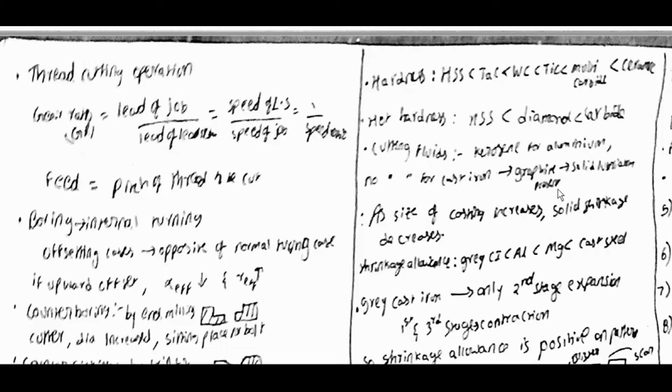As size of casting increases, solid shrinkage decreases. Shrinkage allowance: grey cast iron less than aluminium less than magnesium less than cast steel. Grey cast iron: only second stage is expansion, first and third stage are contraction. So shrinkage allowance is positive on pattern.

Gaseous defects in casting: this is blowhole, on surface blister. If it is like this, then scar. These are pinhole porosity due to dissolved hydrogen gas. Chills to promote unidirectional solidification. Padding, it will be like this: taper of thinner section to thicker section to change progressive solidification to directional solidification. Chills to promote unidirectional solidification, paddings to directional solidification.

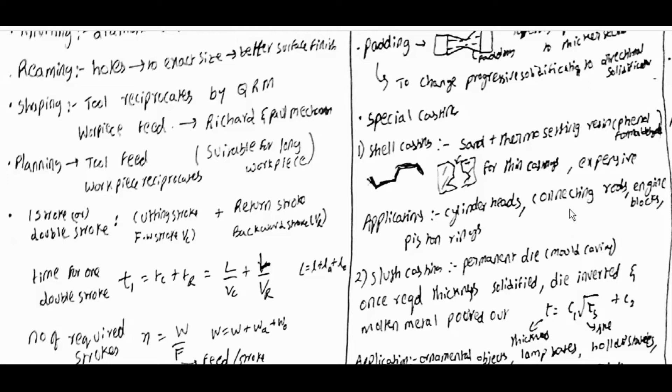Special castings: shell casting, sand plus thermosetting resin, phenol formaldehyde, for thin castings, expensive applications, cylinder head, connecting rods, engine blocks, piston rings.

Slush casting: permanent die mold cavity, once required thickness solidifies, die is inverted and molten metal is poured out. T is equal to C1 root tau plus C2. T is thickness, tau is time. Applications: ornamental objects, lamp bases, hollow statues, candlesticks, etc. from low melting point materials.

Investment casting: wax pattern by pressure die casting or centrifugal. Ceramic mold investment, investment cleaning, dry alcohol coating, stuccoing and drying, coarse ceramic particles, slurry of refractory material. Good surface finish, high dimensional accuracy. Application: aerospace and power generation, turbine blades industry.

Centrifugal casting: molten metal whirlpool design, low density impurities at internal surface, no core required, fine grain structures at outer surface, free from impurities. 100% casting yield. Casting yield is equal to volume of casting by volume of metal poured.

Squeeze casting: open die, then a punch is used to apply pressure. Plaster casting: slurry of plaster on pattern. Pit molding: sand, concrete, cement. Continuous casting, strand casting: molten metal solidified directly into semi-finished billets, blooms or slabs.

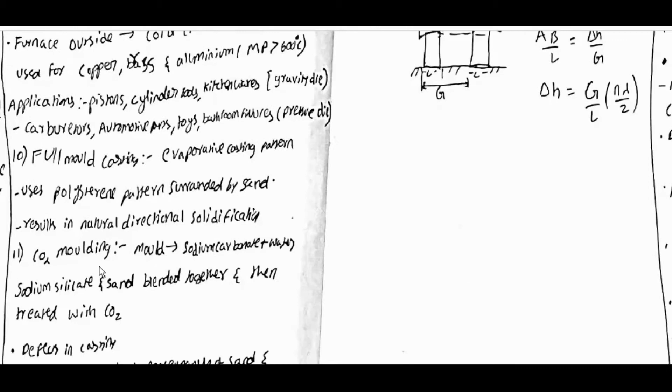CO2 molding: mold of sodium silicate plus water and sand blended together and then treated with CO2. Defects in casting: buckling defect due to poor expansion of sand, high pouring temperature; rat tail defect due to poor expansion of sand. Talysurf, electronic instrument to measure surface finish instantly, diamond point, profilometer, Ra, Rt, Rz.

Interferometry: this is constructive, 2 lambda by 2, 4 lambda by 2, 6 lambda by 2, bright; destructive, dark, lambda by 2, 3 lambda by 2, 5 lambda by 2, merging of two sources of light. Optical flat: AB is equal to n lambda by 2, delta theta is equal to AB by L.

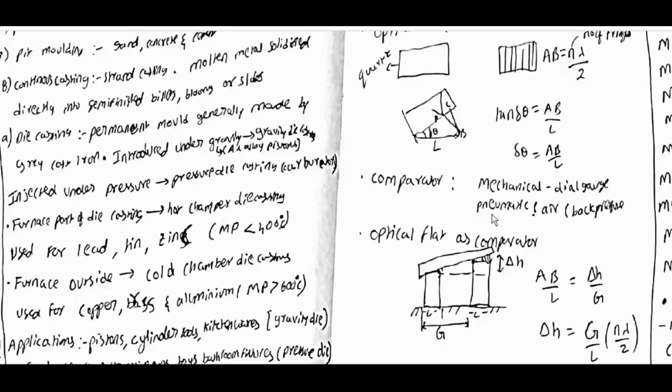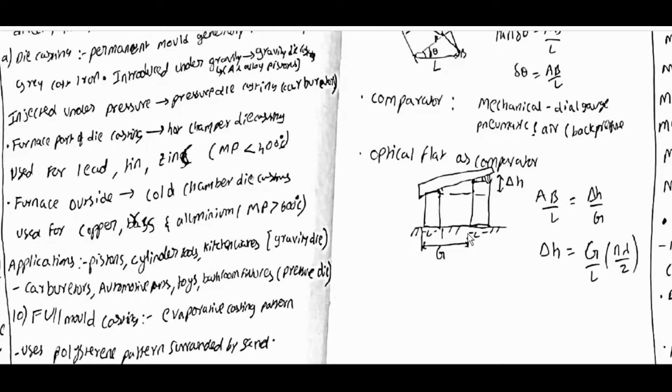Comparator: mechanical dial gauge, pneumatic and air back pressure. Optical flat as comparator. This is delta H. AB by L is equal to delta H by G. Delta H is equal to G by L into n lambda by 2.

M codes: M00 program machine stop, M01 planned stop, M02 end of main program, M17 end of subprogram, M30 end of main program with use of subprogram, M03 spindle rotate clockwise, M04 spindle rotate anti-clockwise, M05 spindle stop, M06 tool change, M07 coolant pump on first, M08 coolant pump on second, M09 coolant pump off, M10 clamping, M11 declamping.

DNC, direct numerical control: a number of individual NC machines are connected to a host computer, bulk memory. DNC, distributive NC: host computer connected to individual CNC. ANC, adaptive NC: liberty to individual CNC to adapt to parameters. ASRS, automatic storage retrieval system: it is a mechanized warehouse. AGV, automatic guided vehicle: material transport system. CMM, coordinate measuring machine: inspection purpose.

Transformation, rotation by theta: x prime, y prime is equal to cos theta, minus sin theta, sin theta, cos theta times x, y. The new coordinate x prime is equal to x cos theta minus y sin theta, y prime is equal to x sin theta plus y cos theta. Reflection about origin: x prime is equal to minus x, y prime is equal to minus y. That means if it is here, then it will be here.

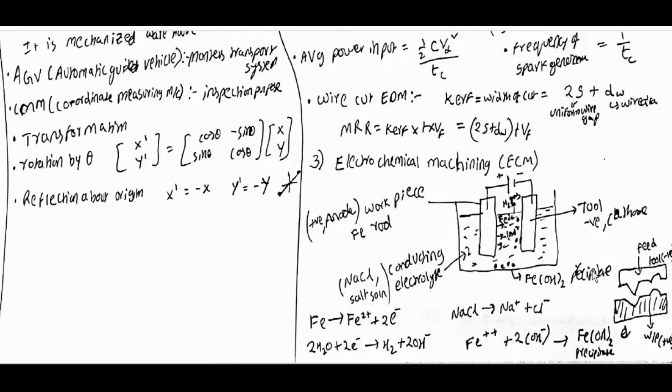Electrochemical machining, ECM. Workpiece, iron rod, positive anode; tool, negative cathode; conducting electrolyte, NaCl salt solution; Fe(OH)2 precipitate. Fe gives Fe2+ plus 2 electrons, 2H2O plus 2 electrons gives H2 plus 2OH minus, NaCl gives Na plus and Cl minus, Fe2+ plus 2OH minus gives Fe(OH)2 precipitate. Feed tool negative, workpiece positive, we can get it in this shape.

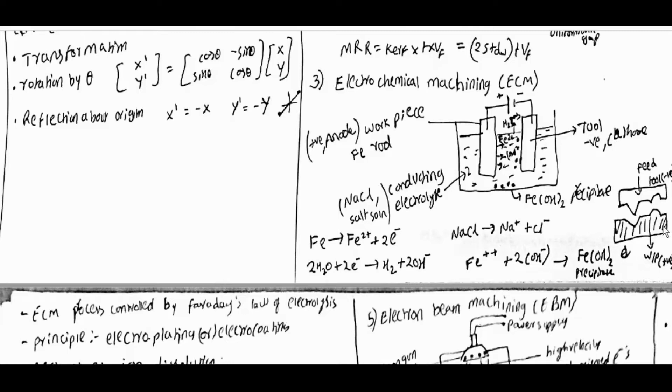ECM process is controlled by Faraday's law of electrolysis. Principle: electroplating or electrocoating. Mechanism: ion dissolution. Conducting tool and workpiece, conducting electrolyte. Wear ratio is equal to infinity, no tool wear. Mass MRR is equal to AI by ZF. I current, A atomic weight, Z valency, F Faraday's constant, 96,500 coulombs. Volumetric MRR is equal to AI by rho ZF. MRR is directly proportional to conductivity of the conducting electrolyte solution. MRR is inversely proportional to distance between electrodes.

MRR is inversely proportional to the distance between electrodes. That means if the distance is less, MRR will be more. Application: complex contour components, for example turbine blades. MRR: PAM greater than ECM greater than EDM greater than USM greater than EBM greater than LBM. USM is in the middle; ECM is first, then EDM, then USM, EBM, LBM.

For alloys, mass MRR is equal to I by F into (Z1 by A1 into X by 100 plus Z2 by A2 into 100 minus X by 100), with X percent 1 and X percent 2. Volumetric MRR is equal to I by F into (rho 1 Z1 by A1 into X by 100 plus rho 2 Z2 by A2 into 100 minus X by 100); the rho terms come in the denominator. If alloy density is given, put rho 1 equal to rho 2 equal to rho 12.

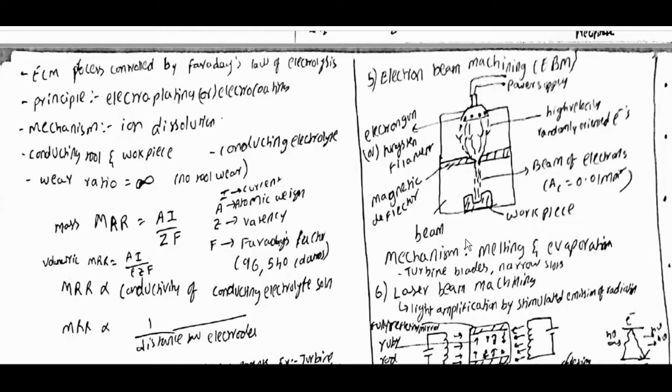Electron beam machining, EBM: power supply, electron gun or tungsten filament, high velocity randomly oriented electrons, magnetic deflector, beam of electrons, area equal to 0.01 mm square, workpiece. Mechanism is melting and evaporation; used for turbine blades and narrow slots. Laser beam machining: laser means light amplification by stimulated emission of radiation.

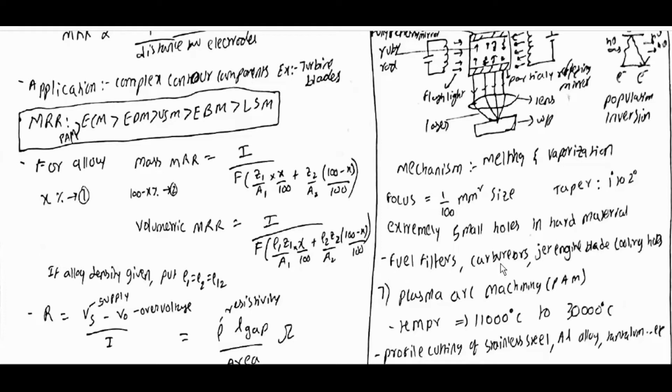Fully reflecting mirror, ruby rod, flashlight, partially reflecting mirror, lens, laser, workpiece, population inversion. Mechanism is melting and evaporation, focus 1 by 100 mm square, taper 1 degree to 2 degrees, extremely small holes in hard material, fuel filters, carburetors, jet engine blade cooling holes. Plasma arc machining, PAM: temperature 11,000 to 30,000 degrees centigrade, profile cutting of stainless steel, aluminum alloy, tantalum, etc.

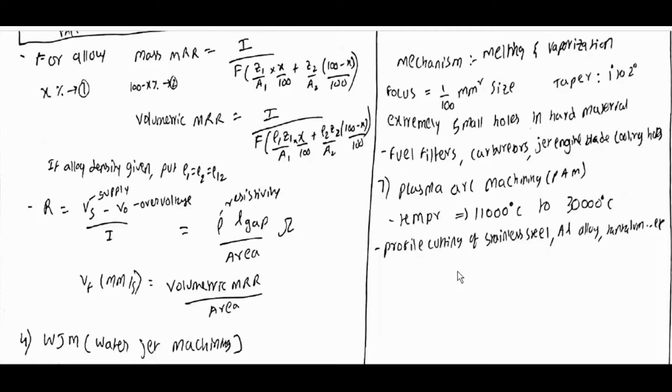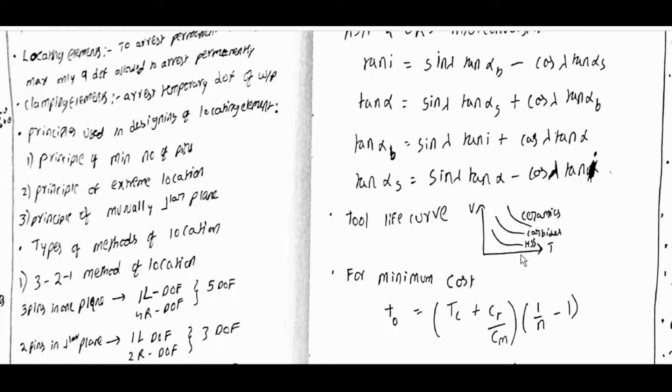Tool life, VT: ceramics, carbides, HSS. For minimum cost, T0 is equal to (TC plus CR by CM) into (1 by n minus 1). TC is tool changing time in minutes. CR is tool regrinding cost plus tool depreciation or replacement cost.

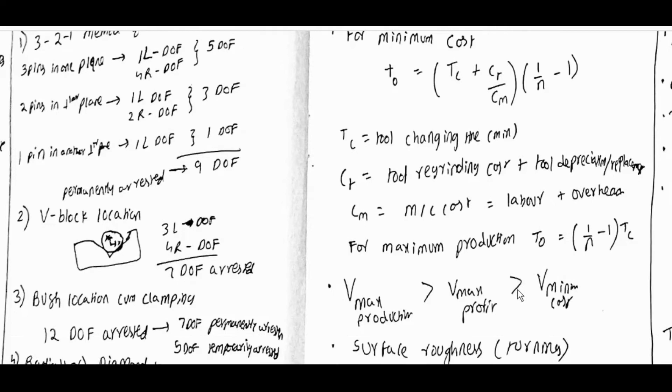CM is equal to machine cost, labor plus overhead. For maximum production, TO is equal to (1/n − 1) into TC. V maximum production greater than V max profit greater than V minimum cost.

Surface finish for turning: ideal surface, R is equal to 0. H is equal to F by (tan psi s plus cot psi e). RA is equal to H max by 4. Practical surface, R not equal to 0. H is equal to F square by 8R. RA is equal to F square by 18 root 3 R.

Cutting fluids: primary aim is cooling, secondary aim is lubrication. Cast iron, dry compressed air; brass, no coolant required and no coolant is used. Aluminium, kerosene oil. Planimeter used to measure surface area. Optical flat, use monochromatic light to determine flatness by interference. Delta H is equal to n lambda by 2.

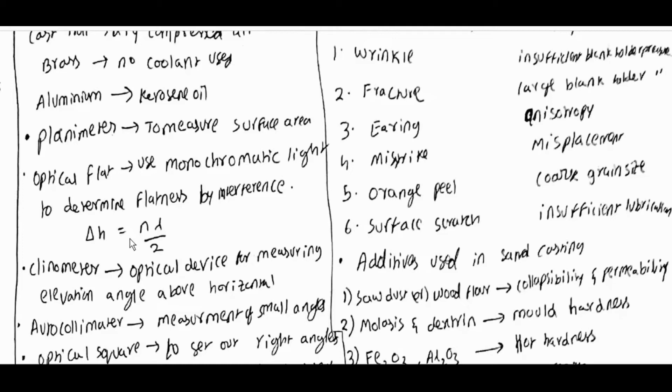Clinometer, optical device for measuring elevation angle above horizontal. Autocollimator, measurement of small angles. Optical square, to set out right angles. Laser scanning micrometer, inspection of tiny workpiece at high temperature and motion. McLeod gauge, used to measure vacuum. Telescopic gauges, used to measure bore size.

Pack rolling, aluminium foil. Rolling: cos alpha is equal to 1 minus delta h by D. Delta h max is equal to mu square R. Projected length LP is equal to R sin alpha is equal to root R delta h. Roll separating force is equal to sigma naught into LP into B.

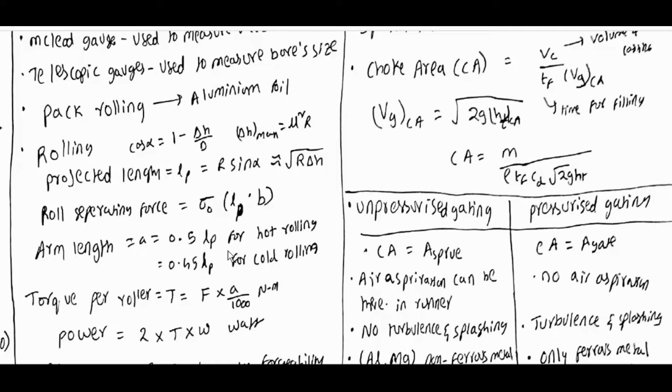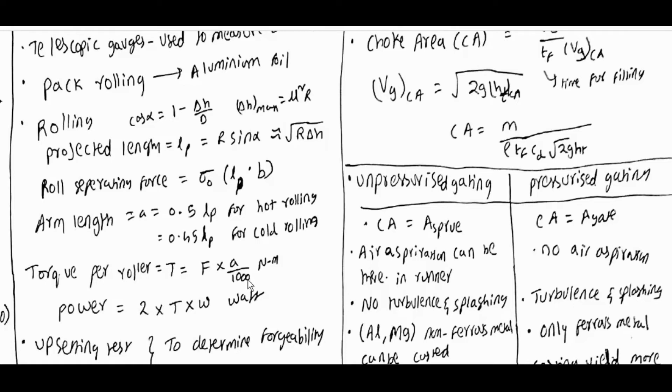Arm length A is equal to 0.5 LP for hot rolling, 0.45 LP for cold rolling. Torque per roller, T is equal to F into A by 1000 Newton meter. Power is equal to 2 into T into omega watt. Upsetting test, hot twist test to determine forgeability.

Hot forging, molten glass as lubricant; cold forging, phosphate as lubricant. Sequence in closed die forging: fullering or swaging, edging, bending, drawing, flattening, blocking, finishing, trimming. Limiting drawing ratio LDR in deep drawing is equal to capital D by small d, which will be 1.6 to 2.3.

Defects in drawing and causes: wrinkle, insufficient blank holding pressure; fracture, large blank holder pressure; earring, anisotropy; misstrike, misplacement; orange peel, coarse grain structure; surface scratch, insufficient lubrication.

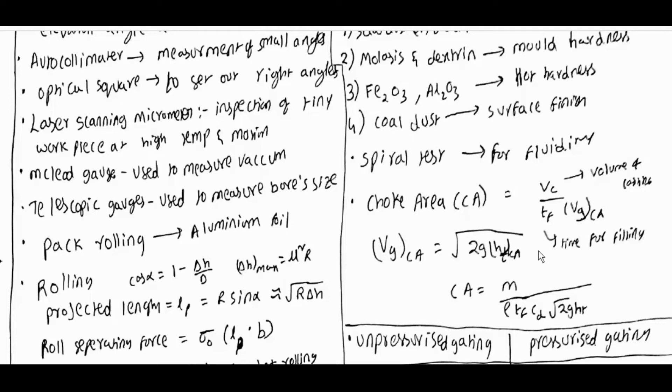Spiral test for fluidity. Choke area CA is equal to VC by TF into VGCA. VC is volume of casting. VGCA is equal to root of 2G HTCA. TF is time for filling. Choke area is equal to M by rho TF into CD root 2G HT.

Unpressurized gating system, choke area is equal to A sprue. Pressurized gating system, choke area is equal to A gate. Air aspiration can be there in runner. Unpressurized, pressure decreases, so air aspiration can be there. No air aspiration in pressurized gating system. No turbulence and splashing; turbulence and splashing. Aluminium, magnesium, non-ferrous metals can be cast in unpressurized gating system. Pressurized, only ferrous metal can be cast.

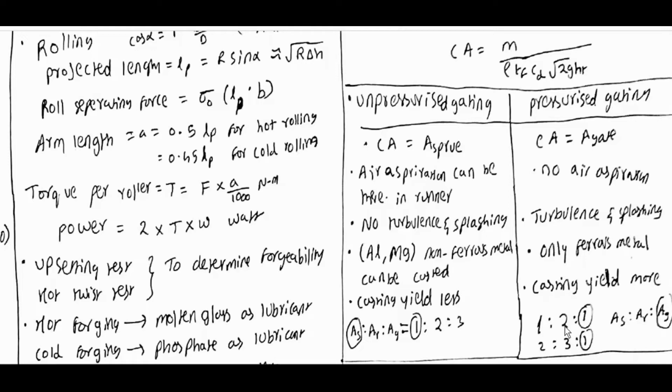Casting yield is less. Here casting yield is more. A sprue is to A runner is to A gate. Here one in the starting. Here one in the ending. Even though it is there, if one is there at the end, then it is pressurized gating system.

Riser optimum conditions: side riser H is equal to D, V by A is equal to D by 6. Top riser H is equal to D by 2, V by A is equal to D by 6. Shape factor is equal to L plus W by T. Geometry shape factor: cube 2, sphere 2, cylinder for H equal to D is 2.

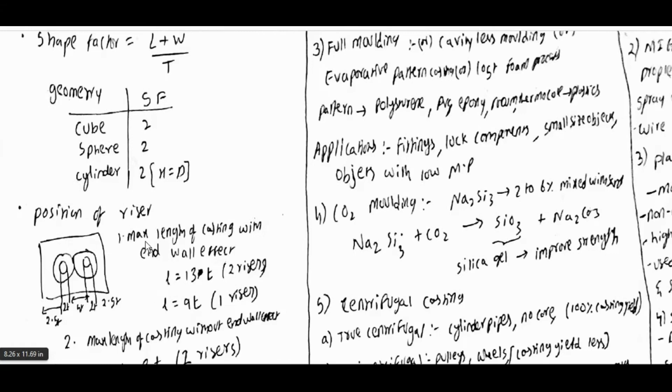Position of riser: max length of casting with end wall effect, L is equal to 13T with 2 risers, L is equal to 9T with 1 riser. Maximum length of casting without end wall effect, L is equal to 8T with 2 risers, L is equal to 4T with 1 riser. From 2.5 to 2.5, with end wall effect 2.5 to 2.5.

Chills and paddings: directional solidification. Match plate pattern: complex shapes in mass production, example piston rings. Sweep pattern: 3D complex profile of symmetric geometry, example large bells. For loam, 50% clay and 50% silica used.

Shell molding, it will be like this. Molding material: fine grain silica, phenolic resins, phenol formaldehyde, urea formaldehyde, alcohol. Application: cylinder blocks of IC engine, rocker arm, wall plates of refrigerator.

Investment casting: disposable pattern, slurry of ethyl silicate, silica flour, water; vacuum to reduce gas; costly setup. Application: complex shapes, high melting point and strength, turbine blades, jet engine parts, medical implants, gold ornaments, dentures.

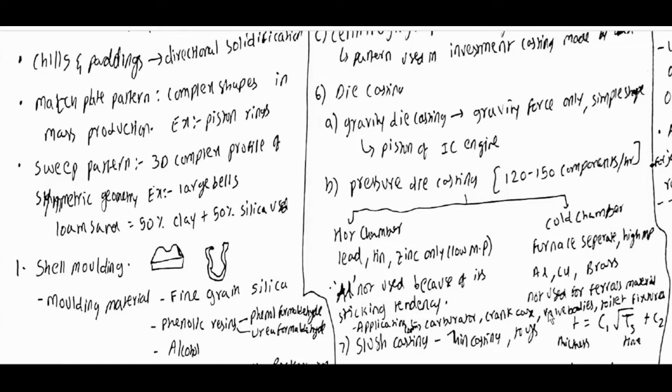Aluminum not used in hot chamber because it has a sticking tendency. Cold chamber not used for ferrous materials. Applications: carburetor, crankcase, valve bodies, toilet fixtures.

Slush casting: thin castings, toys. T is equal to C1 root t plus C2, where T is thickness and t is pouring time. Squeeze casting: brake shoe made of aluminium, bush made of brass and bronze. Arc blow: magnetic field, weld spatter.

TIG or GTAW, gas tungsten arc welding: DCEN, straight polarity, direct current electrode negative, used for all except aluminium and magnesium. Direct current electrode positive, reverse polarity, known as cathodic cleaning. AC source used for magnesium and aluminium.

Non-consumable tungsten electrode, zirconium and thorium alloyed to increase melting point, used to weld aluminium and magnesium alloys in aerospace, automobile and chemical industry.

MIG or GMAW: globular transfer at low current, only gravity. Spray transfer at high current, gravity plus magnetic field, pinch effect. Wire in form of consumable electrode in inert atmosphere.

Plasma arc welding, PAW, maximum temperature 11,000 degrees centigrade. Non-consumable tungsten electrode, ceramic nozzle. High depth of penetration and heat affected zone is high. Used for welding titanium, nickel, cobalt and stainless steel in aerospace, jet engine, turbine blades.

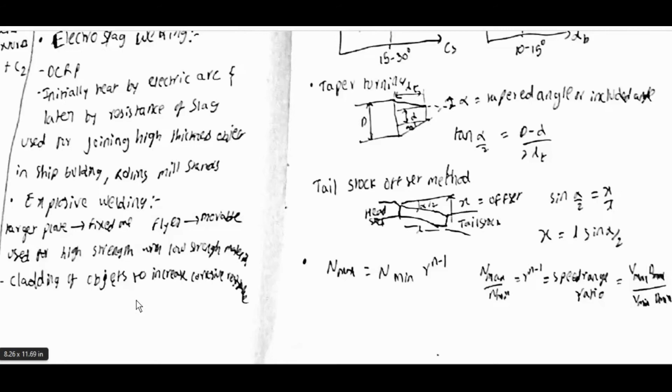Brazing: capillary; soldering: capillary; braze welding: gravity. Brazing: 427 degrees less than filler melting point, less than workpiece melting point. Soldering: filler melting point less than 427 degrees centigrade. Braze welding: when edge preparation is possible, temperature similar to brazing only.

Filler copper plus zinc, brass, in brazing. Filler with lead plus tin, solder. Filler bronze, copper plus tin. Flux borax; flux ZnCl2 plus NH4Cl. Used for leak-proof liquid circuits.

Used for PCB component fabrication. Used for cutting tool tip. Used for joining cutting tool tip to shank.

Electron beam welding, EBW, focused by magnetic lens, no flux. Laser beam welding, LBW, is focused by optical lens, no flux, no filler. Micro welding, high MRR; vacuum necessary for EBW, laser no vacuum necessary.

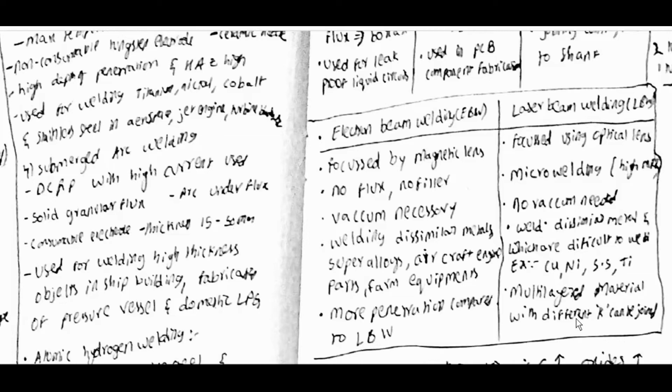Electron beam welding for dissimilar metals, superalloys, aircraft engine parts; welds dissimilar metals which are difficult to weld, example copper, nickel, stainless steel, titanium. More penetration in EBW compared to LBW. Laser beam: multi-layered material with different K can be joined.

Properties: as Tm, melting point, increases, K increases, alpha increases, percentage carbon increases, oxides increase, in all these cases weldability decreases. If Tm increases, weldability decreases. If thermal conductivity increases, weldability decreases. Alpha increases, weldability decreases.

Tool life versus CS: increase and then decrease. Tool life versus alpha B: increase and then decrease. Back rake angle 10 to 15 degrees, here 15 to 30 degrees. These are all random points. Taper turning: capital D, small d, L, T, alpha taper angle or included angle.

Tan alpha by 2 is equal to capital D minus small d by 2L. Tail offset method: x offset, sin alpha by 2 is equal to x by L. X is equal to L sin alpha by 2. X is offset, L is length.

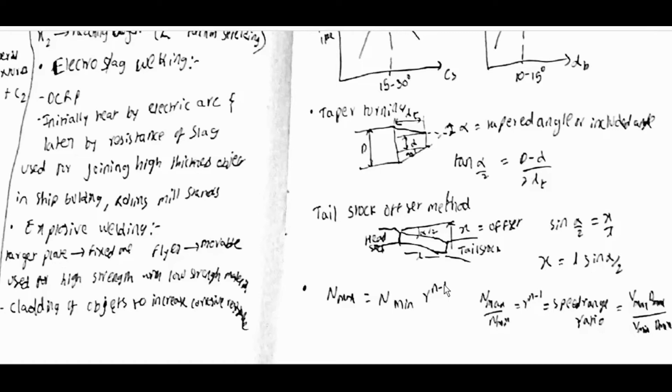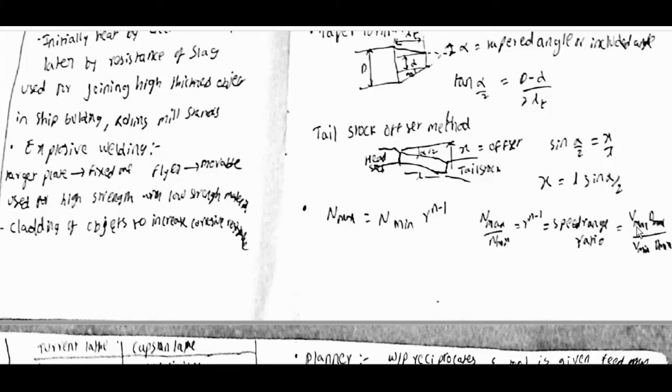Headstock, tailstock. Nmax is equal to Nmin into R power N minus 1. Nmax by Nmin is equal to R power N minus 1 is equal to speed range ratio is equal to Vmax Dmax by Vmin Dmin. Nmax, Dmax.

ACME: bears load in both directions, lead screw. Buttress: bears load in one direction, bench vise. Thread cutting on lathe, thread chasing. RHT: move right to left, odd number of idlers used. LHT: move from left to right, even number of idlers used.

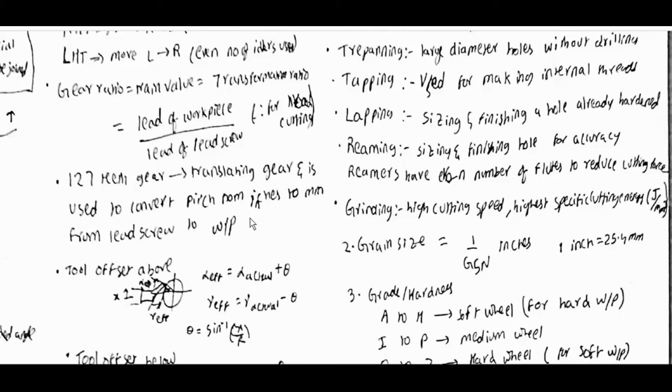Gear ratio is equal to train value is equal to transmission ratio is equal to lead of workpiece by lead of lead screw. Therefore, for thread cutting, lead of workpiece by lead of lead screw. 127 teeth gear, translating gear, is used to convert pitch in inches to mm from lead screw to workpiece.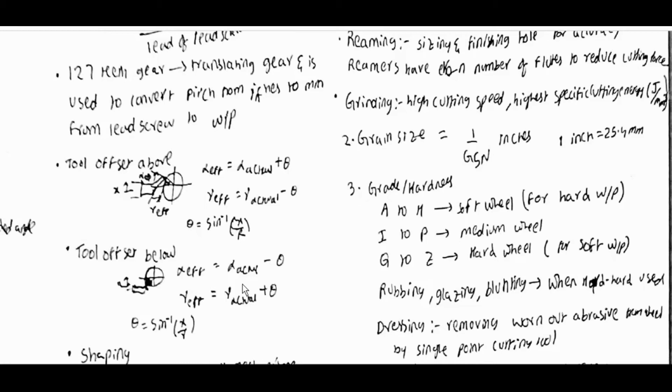Tool offset above: alpha effective is equal to alpha actual plus theta, gamma effective is equal to gamma actual minus theta. Theta is equal to sin inverse x by r. Tool offset below: alpha effective is equal to alpha actual minus theta, gamma effective is equal to gamma actual plus theta. Theta is equal to sin inverse x by r.

Shaping: feed by ratchet and pawl mechanism, reciprocation by Whitworth quick return mechanism, clapper box used to lift tool during return stroke. Used to machine small flat workpieces. V forward, V return, hydraulic, V mechanical, it will be like this. Small flat; large means we will use planing.

Planer: workpiece reciprocates, tool is given feed motion, heavier and more rigid than shaper, very large compared to shaper. Slotter: invented before shaper, ram reciprocates vertically, no QRM used. Drill: rake angle minimum at dead center and it increases to maximum at periphery, equal to helix angle. Soft and ductile workpiece: point angle decreases, rake angle increases, helix angle increases.

Fast helix drill: high twist, low strength, high lifting of chips. Soft and ductile workpiece means point angle is less, helix angle more. Hard and strong workpiece: point angle more, rake angle less, helix angle less. Slow helix drill: low twist, strong, low lifting of chips.

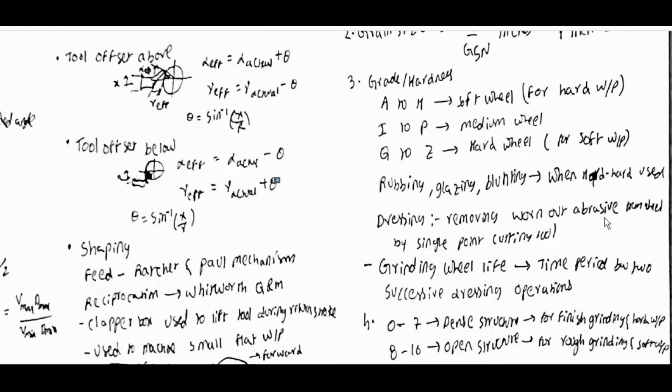Dressing: removing worn out abrasive from the wheel by single point cutting tool. Grinding wheel life: time period between two successive dressing operations. 0 to 7: dense structure for finish grinding and hard workpiece. 8 to 16: open structure for rough grinding and soft workpiece.

Centerless grinding: direction of workpiece opposite to all other wheels. Guiding or regulating wheel and grinding wheel. Solid cylinder: external centerless grinding, RW less than GW, regulating wheel less than grinding wheel. Hollow cylinder: internal centerless grinding, regulating wheel greater than grinding wheel.

EDM, high voltage low current process. Temperature 10,000 degrees centigrade. MRR is equal to 40 I by Tm power 1.23. Tm is melting point temperature of workpiece in degrees centigrade, centimeter cube per minute. For high MRR, tool K should be high, C should be high. Workpiece K should be less, C should be less.

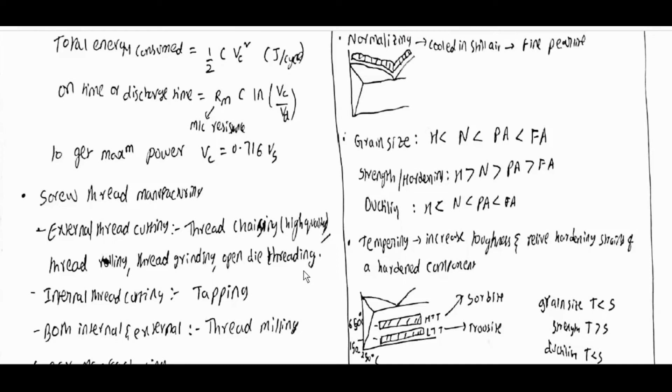Screw thread manufacturing: external thread cutting, thread chasing, high quality thread rolling, thread grinding, open die threading; internal thread cutting, tapping; both internal and external thread milling. Gear manufacturing: external gear process, gear planing, gear milling, gear broaching, gear hobbing. Gear hobbing highly accurate due to indexing mechanism. Both internal and external gear shaping. Internal gear shaping with pinion cutter.

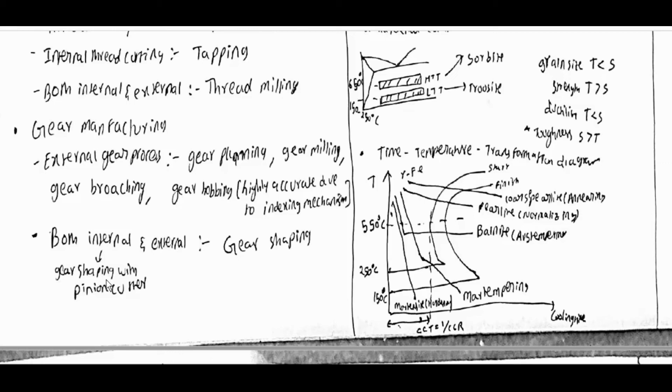Heating, holding or soaking, uniform grain formation, then slow cooling: coarse grain, high ductility and machinability, low strength and hardness, low residual stress. Fast cooling: high strength and hardness, low ductility and machinability, high residual stress. Hardening, it will be 50 degrees above upper critical temperature and 50 degrees above lower critical temperature for hypereutectoid steels. Hardening cooled rapidly by quenching in oil or water.

Martensite body centered tetragonal. DH HCS greater than DH MCS greater than DH LCS, depth of hardenability; high carbon steel more hard. Full annealing, process annealing, cooled in furnace at slow cooling rate. Normalizing, completely above, cooled in still air, fine pearlite. Grain size: hardening less than normalizing less than process annealing less than full annealing.

Strength or hardness: hardening greater than normalizing greater than process annealing greater than full annealing. Ductility: hardening less than normalizing less than process annealing less than full annealing. Tempering, increase toughness and relieve hardening strains of hardened component.

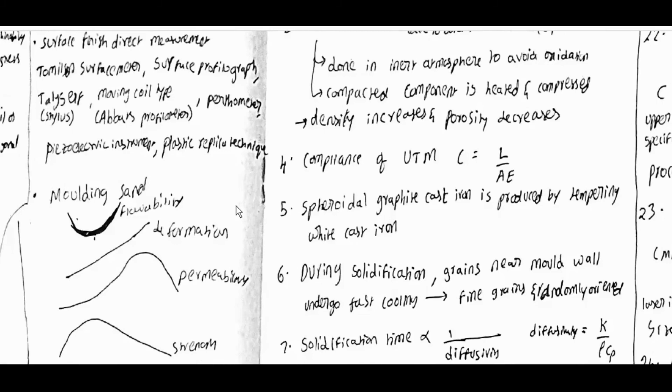Molding sand: as percentage water content increases, strength increases and then decreases, permeability increases and then decreases, deformation keeps on increasing, flowability keeps on increasing.

GATE previous papers. By increasing cooling rate, chances of formation of white cast iron increases. Mild steel 0.15% carbon, wrought iron 0.1% carbon. Sintering improves hardness and toughness due to bond formation. Done in inert atmosphere to avoid oxidation. Compacted component is heated and compressed. Density increases and porosity decreases. Compliance of UTM, C is equal to L by AE.

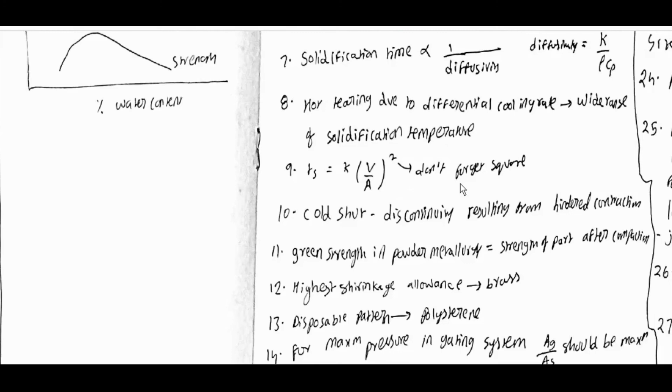Spheroidal graphite cast iron is produced by tempering white cast iron. During solidification, grains near mold wall undergo fast cooling, so fine grains and randomly oriented. Solidification time inversely proportional to diffusivity. Diffusivity is equal to K by rho Cp. Hot tearing due to differential cooling rate, wide range of solidification temperature. Ts is equal to K (V by A) whole square, don't forget. Cold shut discontinuity resulting from hindered contraction.

Green strength in powder metallurgy, strength of part after compaction. Highest shrinkage allowance brass. Disposable pattern polystyrene. For maximum pressure in gating system, Ag by As should be maximum. Centrifugal casted product, N squared D is equal to constant. Fast cooling, fine grains with high density and low porosity.

Investment casting parts with hardened skins and soft interior. In explosive welding, maximum velocity of impact is fixed by velocity of sound in flyer plate. In solid state welding, contamination may be removed by plastic deformation. In friction welding, melting of base metal is not involved. In resistance welding, heat is generated due to resistance between asperities between touching plates. For cutting steel, not welding, oxidizing flame of oxyacetylene is used.

Process capability ratio is equal to USL minus LSL by 6 sigma. CPU, upper specification calculation, is equal to USL minus mu by 3 sigma. CPL, lower specification calculation, is equal to mu minus LSL by 3 sigma. Process capability index is equal to minimum of CPU, CPL.

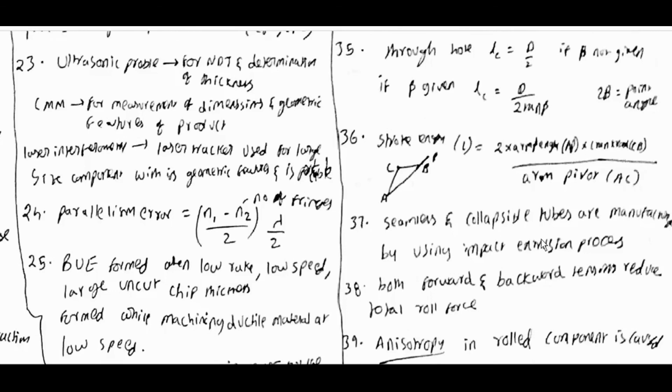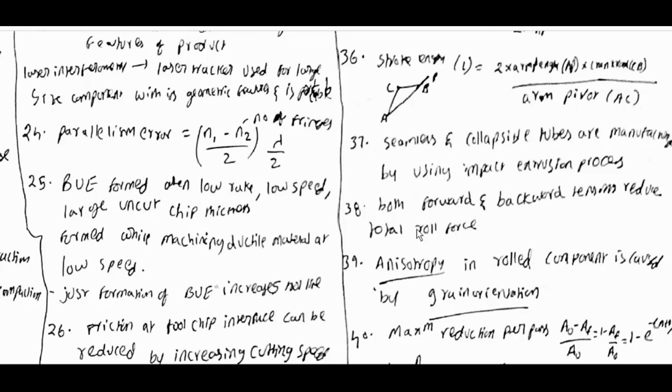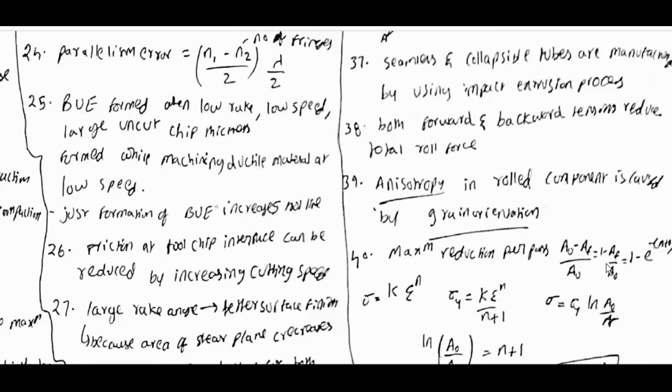Seamless and collapsible tubes are manufactured by using impact extrusion process. Both forward and backward tensions reduce total roll force. Anisotropy in rolled component is caused by grain orientation. Maximum reduction per pass, A0 minus Af by A0, is equal to 1 minus Af by A0, is equal to 1 minus e power minus n plus 1. Sigma is equal to k epsilon power n, sigma y is equal to k epsilon y power n by n plus 1, sigma is equal to sigma y ln of A0 by Af, ln of A0 by Af is equal to n plus 1.

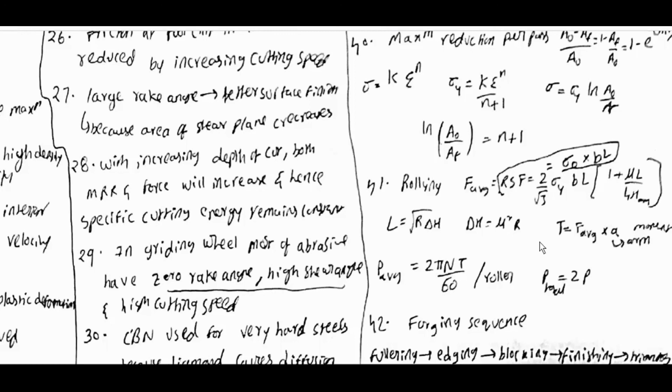Rolling force F average is equal to roll separating force is equal to 2 by root 3 sigma y into BL into 1 plus mu L by 4 H average, is equal to sigma naught into BL. L is equal to root R delta H is equal to mu square R, T is equal to F average into A, P average is equal to 2 pi NT by 60 per roller, P total is equal to 2P.

Forging sequence: fullering, edging, blocking, finishing, trimming. Forging force is equal to sigma y into Af into 1 plus 2 mu Rf by 3 Hf. The area of triangle is equal to root of S into S minus A into S minus B into S minus C. S is equal to A plus B plus C by 2.

ECM, stock removal, non-passivating electrolyte, high thermal conductivity, finish machining, passivating electrolyte. In EBM, maximum depth to width is equal to 25:1. MRR: LBM less than EBM less than USM less than EDM less than ECM. EDM tool high thermal conductivity, high electrical conductivity, reduces tool wear, low specific heat of workpiece, more temperature rise, more MRR. ECM complex cavities, blind holes, through holes.

MRR directly proportional to gram atomic weight, directly proportional to current density, directly proportional to electrical conductivity of electrolyte, inversely proportional to distance between tool and workpiece. Zigzag holes, LBM, laser beam machining. Etch factor is equal to undercut by depth of cut, ECM.